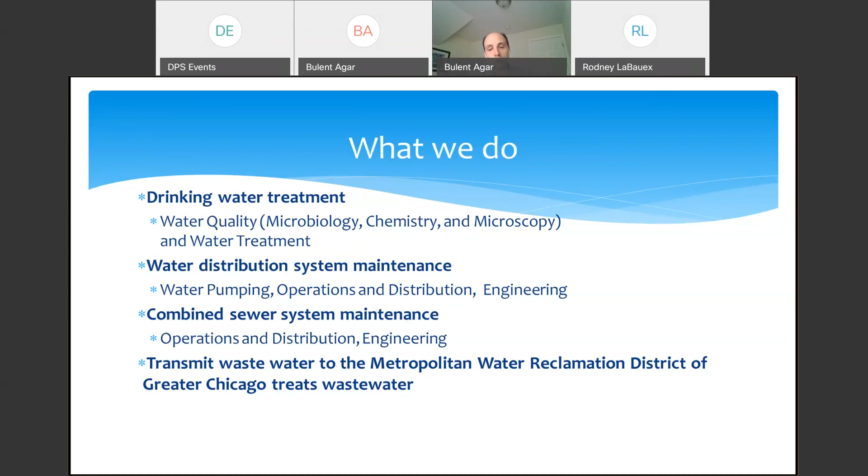We have a combined sewer system, which is both rainwater and sewage combined. We're in charge of the operations and distribution of it, and also do the engineering for replacements or rehabilitation of our system. The one thing we don't do is wastewater treatment. Through our sewer system, which is gravity fed, we take the wastewater and transmit it to the Metropolitan Water Reclamation District of Greater Chicago, the MWRDGC, who treats the water for us.

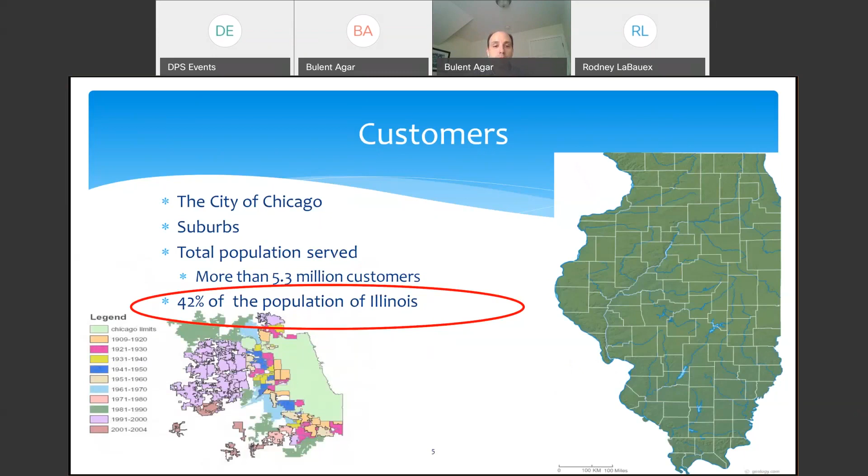To look at the big picture, we have a huge customer base. We serve the city of Chicago and also our suburbs, over 40 suburbs, over 120 municipalities. Our total population served is about 42% of the population of Illinois, which includes Chicago and about 2.5 million people in the suburbs, which would be about 5.3 million customers overall.

Let's take a closer look at our system. For the water system, we have some major assets: 2 crib structures about 2 miles out in the lake, and 2 of the largest water plants in the top 10 list in the world - Jardine Water Purification Plant, number 1, and Eugene Sawyer Purification Plant, I believe 8th right now. So we've got the 2 largest in the top 10.

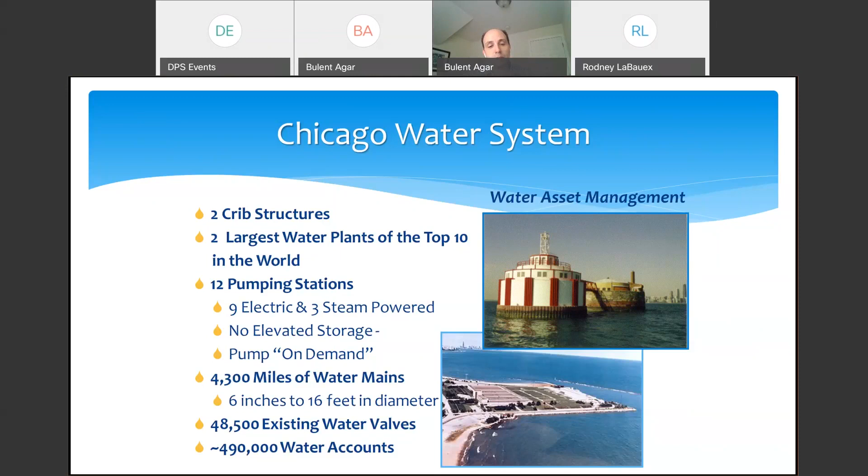We have 12 pumping stations, 9 electric and 3 steam powered. We have no elevated storage, so we don't have those water tanks you see in the suburbs. Everything's pumped on demand, meaning we adjust during winter, summer, hot seasons, hot weeks. It's 24/7 operation with people watching demands, not only from the city of Chicago but the suburbs too. We've got about 4,300 miles of water mains ranging from 6 inches to 16 feet in diameter, 48,500 existing water valves, and 490,000 water accounts.

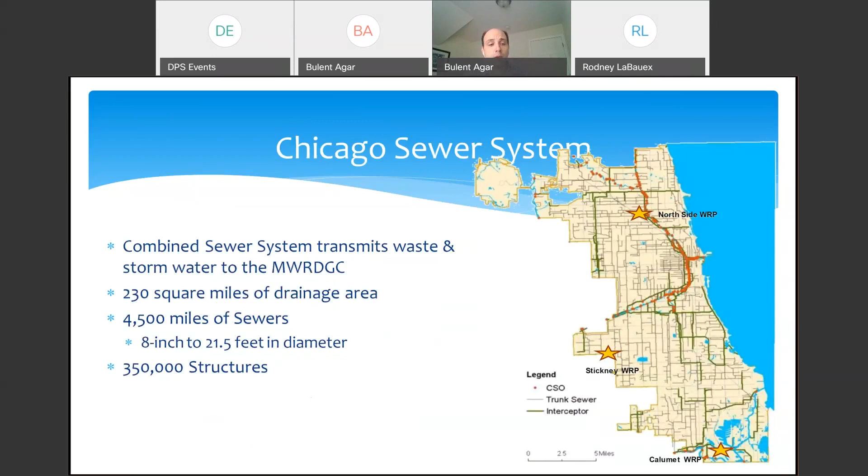Diving into the sewer system, it's a combined sewer system that transmits waste and stormwater combined to MWRD. We're serving about 230 square miles of drainage area. We've got about 4,500 miles of sewers, ranging from 8 inches to 21 and a half feet in diameter, and 350,000 structures, which are the manholes and catch basins in the street.

Having looked at our system, it obviously needs maintenance and renovations. We have to upgrade our system, put in new water mains and sewers, and upgrade our facilities. So we have our 10-year program that we're working on right now.

The goal for that program is to replace 880 miles of water mains. We've completed about 760 miles of it so far.

And to rehabilitate about 700 miles of our sewer system, which would be both reconstructing our sewers and upgrading the size, or if the capacity is there but the sewer is older, then we reline the sewer, the inside of it, so that we extend the life another 50 to 75 years. So we've completed about 659 miles of that work, reconstruction or lining of the sewers.

And our goal is to line about 95,000 structures, the catch basins and manholes. We've completed about 88,000, over 88.5, so far.

On the facility side, like we mentioned, the pumping stations, our goal is to basically convert our pumping stations from steam to electricity, because it saves a lot of money on maintenance too. We have two designed. We completed Springfield. One is under construction, that's Central Park, and Cermak is going to be next.

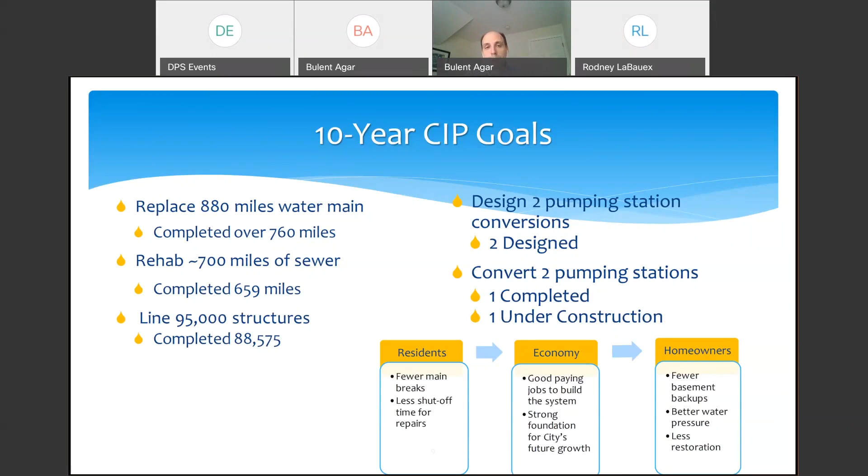And obviously restoration too, because every time you go out and start digging streets for maintenance or repairs of your water mains and sewers, you're basically breaking up the street and redoing asphalt. So in our 10-year program, we're actually coordinating with IDOT, CDOT, and other utility companies, the third parties like ComEd, telecoms, and People's Gas, to make sure we get into the street once and for all. So we do our work, they do their work, and then CDOT pays, or we pay, or IDOT pays. So there's less disruption to the residents.

Okay, so having talked about our department a little bit, what we do and how we do it, let's take a look at the projects that are coming up next.

It's great that we're keeping the same schedule that we mentioned in our last presentation too. On the design consulting services, new design RFQs are coming out. We're hoping, again, second quarter of 2021, so it should be in the street really quickly. These will be new design RFQs to be put out, approximately $5 million as a cap for 5 years, as soon as we can.

On the facility side for design, the Western Avenue pumping station conversion is probably going to be a contract of about $10 million in value over 5 years, and we're hoping to get that out really quickly too. Our program management RFQ, we're still planning for 2021. We're looking at project management and construction management being separate, but we're hoping to get that out this year, early this year.

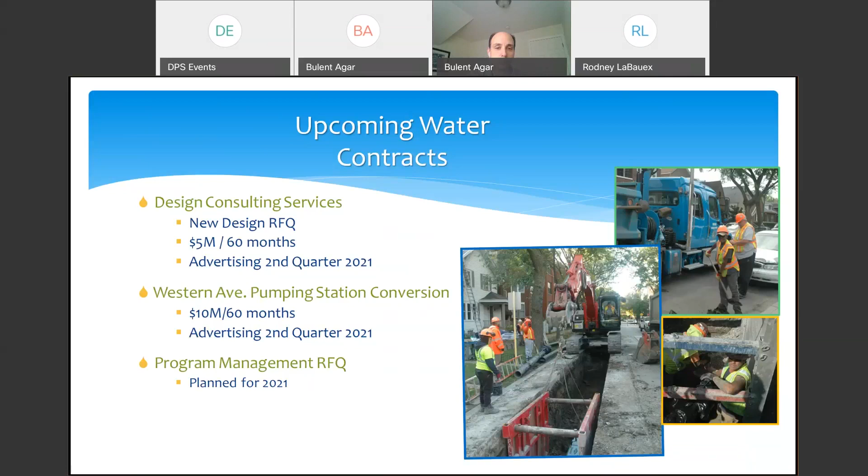Moving ahead to our water mains and facilities improvement contracts, for upcoming work we're planning to get topographic survey contracts out there. We will have consultants, surveyors, put under contract to survey the areas where we'd like to do water main designs. That's the first step in water main design for us.

We put out the surveys for topo, get the information back, and the design is done in-house. So those contracts will be out, and we're looking at maybe $4 million each for those contracts. That's coming up really soon here.

At Jardine plant, we have a sediment force main project that, again just like Sawyer plant, we're hoping to put out on the street towards the end of 2021.

For pumping station work, we listed 3 projects: Cermak pumping station standby generators and switchgear, Lakeview pumping station electrical and control panel improvements, and Western Avenue, which is a major project converting from steam to electric.

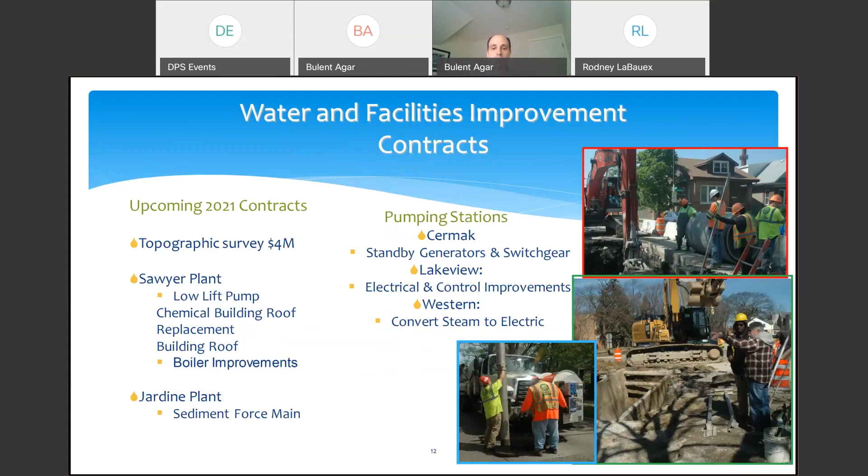Going to the sewer side, our sewer improvement projects mainly use our IEPA funds. You might have seen this before too, our geopolymer rehabilitation projects, which are sewer lining projects but on a larger scale.

We are going to put out 3 contracts to line our large diameter sewers, which may not be able to be done with conventional methods. We're looking at maybe $30 to $40 million worth of total work on these 3 projects, which are very close to being put out on the street.

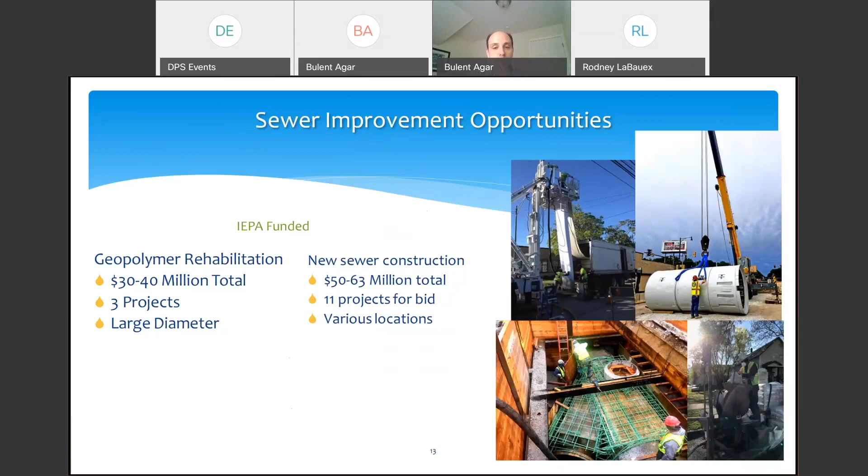As for new sewer construction, this would be the reconstruction of the sewers and upsizing the sewer mains themselves. We still have $50 to $63 million worth of work to put out on the street. We're looking at 11 projects for bid in 2021 at various locations, broken down as follows.

We have these projects to put out the second quarter of 2021 - we're in the second quarter right now, so May, June hopefully to put on the streets: 78th and 76th Street sewer improvement projects, Pershing, Rogers and Greenview sewer improvement projects, and the 58th Street, Parnell and 44th Place sewer improvement project. This is one project itself, covering a few different areas, but going in as one package.

Archer Avenue sewer improvement project, and also Parnell and Halsted sewer improvement projects. We're hoping for these to go out the door first.

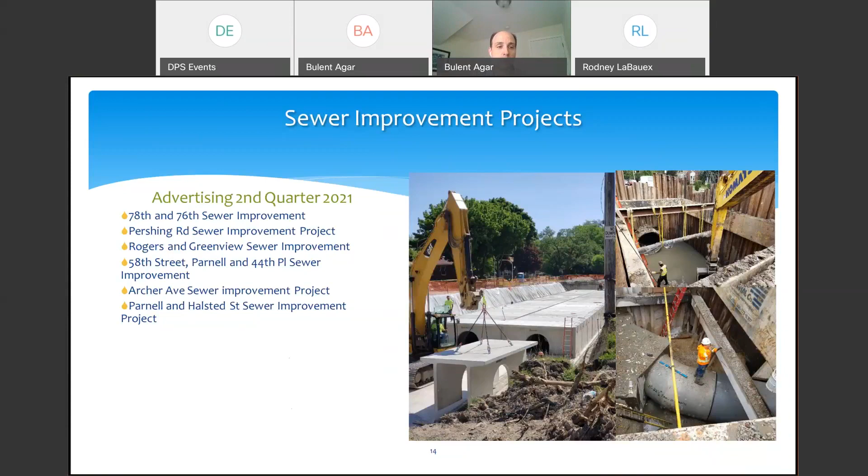The next batch of projects coming up in 2021 would be Hegewisch, Barry and Sheffield, Englewood and Greater Grand Crossing sewer improvement projects, Lunt and Lakewood, Sacramento on 26th, and the 3 various locations we mentioned before for the large diameter sewer lining projects. Following the first batch, these are going to be going next.

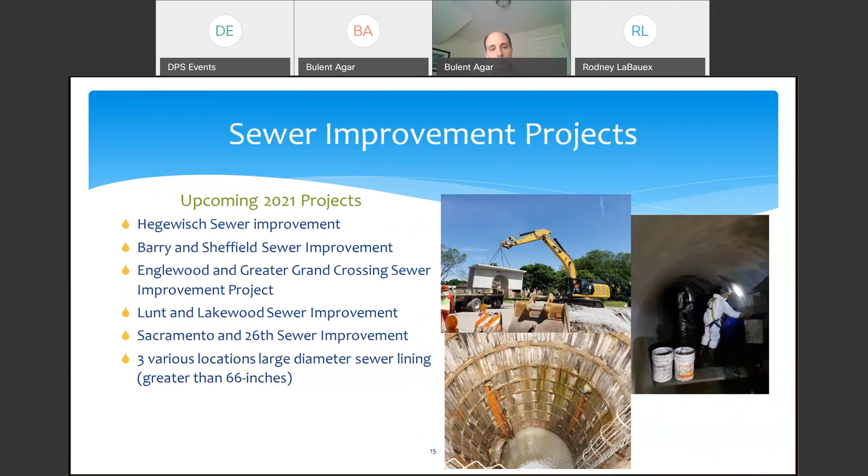I'd like to touch a little bit on the lead service line replacement program too. You might have seen this in 2021 - we rolled out just a few programs for lead service line replacement. To put it in perspective, we have over 400,000 lead service lines to be replaced in the city, so this is just basically a start of these programs.

The 2 programs we'd like to highlight today would be the 2021 Homeowner Initiated Lead Service Line Replacement Program. This is for homeowners who would like to hire their own contractors and remove the existing lead service line on their property. If they go ahead and do this, the city is going to waive up to $3,100 in permit fees, connect a new service line to the water main, and at the tap location install a free water meter along with this project.

So there's going to be some opportunities for water main contractors, or more I would say plumbing contractors, as this program rolls out and gets in full speed.

The other program we'd like to talk about is the 2021 Equity Lead Service Line Replacement Program. This will be free to residents if it meets certain requirements - it's going to be private and public side right now is what it looks like. But they would have to own and reside in their homes, the household income has to be below 80% of the median income for the area, and have had consistent lead concentrations of above 15 parts per billion in their water, as tested by DWM.

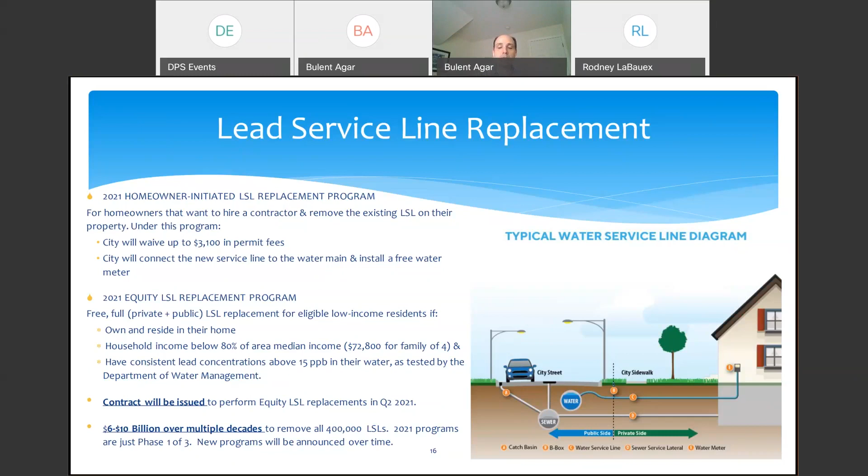We understand the importance of participation from our minorities, and procurement and compliance is always looking into different ways to introduce these in our contracts. We have opportunities on the water and sewer side, similar to other departments. For water subcontracting, there's land survey, electrical, HVAC, materials testing, construction work, asphalt placement, trucking, landscaping, concrete placement, and pipe installation projects. We'll continue this kind of work in 2021.

On the sewer side, sewer construction and tunneling are part of the work we're thinking about, along with cleaning, televising, materials testing in the field, asphalt, trucking, landscaping, and concrete and catch basin work. These are some of the areas where there will be opportunities for minority firms.

Again, minimum of 26% for MBE, minimum of 6% for WBE, and also the newly introduced veterans-owned business goal. These will depend on the scope of the projects and a review of minorities in the area by compliance in our department, so there will be opportunities as these projects are bid.